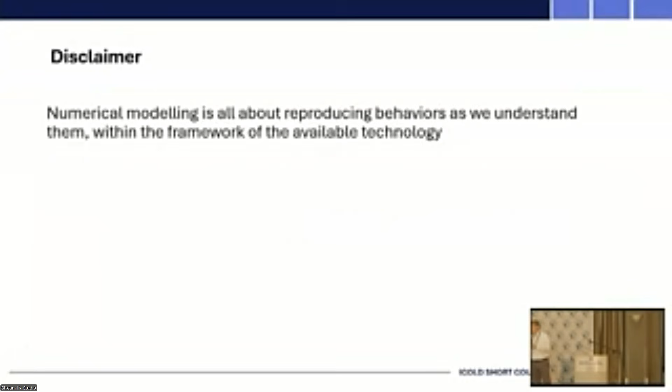So I start with a disclaimer. I will talk about numerical modeling, nonlinear deformation analysis. So the behaviors we think we understand, we create equations that we put into the computer, and the computer will reproduce such behavior. We are not creating knowledge.

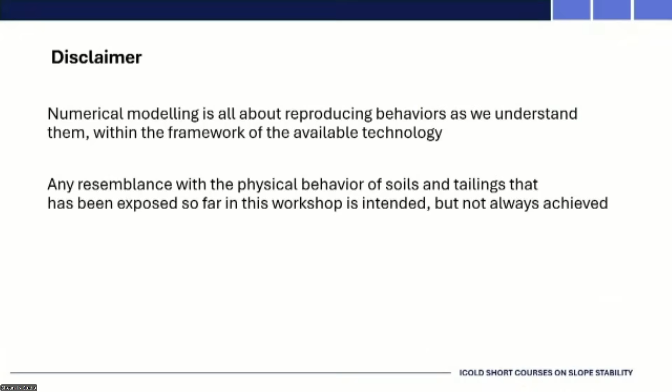We are simulating our perception of what is going on. Sometimes they look similar, so any resemblance with physical behaviors as we understand them today is intended, but sometimes we cannot make it. So it's always some sort of a compromise.

And while nonlinear deformation analysis has a lot of uses, for instance for informing monitoring systems and all sorts of things, today we will just focus on vulnerability assessment, addressing the risk of a tailings dam to flow liquefaction.

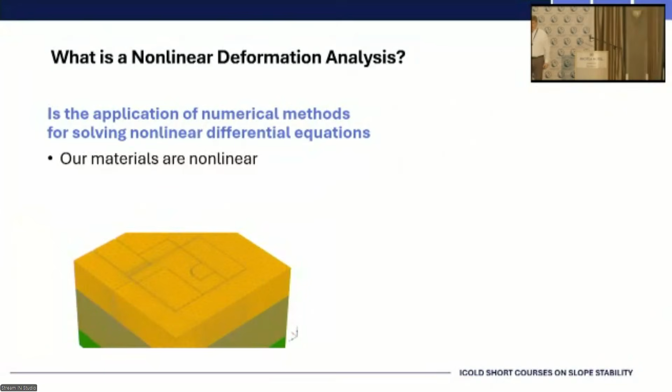Okay, what is a nonlinear deformation analysis? Well, it's the application of numerical methods to solve nonlinear differential equations. And our materials are nonlinear.

Our problems have complex shapes, and we build in stages. So on the right side, you see a number of stress-strain behaviors that exist and are applied to some soils, rocks, or materials that we may use.

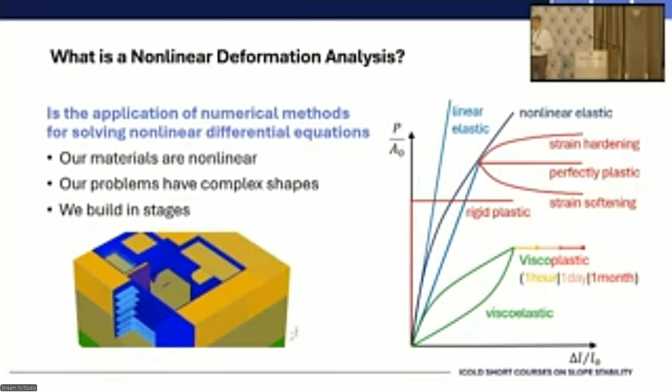On the left hand, you see an excavation, a civil excavation, with a lot of stages. You use a nonlinear deformation analysis to apply any of these behaviors that you see on the right to a problem that may be anything, a tunnel, an excavation, or a tailings dam.

Where should we use nonlinear deformation analysis? Well, I compare with limit equilibrium. It's an easy thing for me. In limit equilibrium, equilibrium and kinematics are only satisfied on the sliding surface, and we try a lot of them.

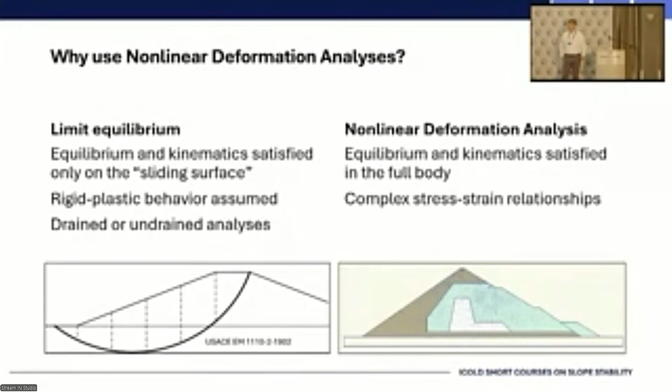Instead, in nonlinear deformation analysis, equilibrium and kinematics are satisfied in the full domain of the study. Limit equilibrium is rigid plastic; nonlinear deformation analysis covers any of the many stress-strain relationships we've seen. Limit equilibrium is fully drained or fully undrained; NDAs also handle transient flow and consolidation. Limit equilibrium has no inertial forces; NDA accounts for a lot of inertial forces in dynamic pore pressure.

While I was speaking, the dam at the bottom right was shaking. Those were waves coming from a ground motion, from an earthquake, propagating with amplifications within the dam body. All this is easily achievable with nonlinear deformation analysis, and is way beyond what can be done with anything close to limit equilibrium analysis. So which are the ingredients of a good nonlinear deformation analysis?

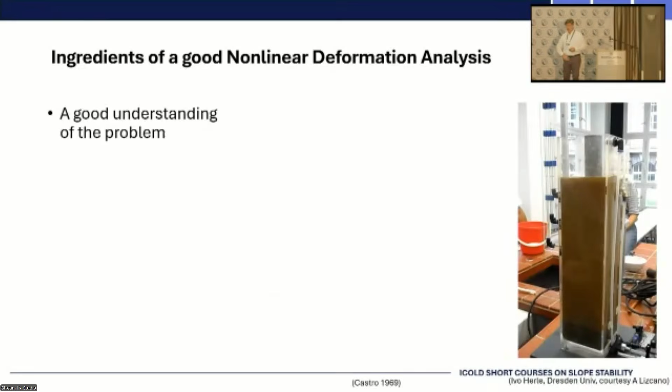First, a good understanding of the problem at hand. So now we have this chart from Castro 1969. It was already presented before in a much nicer format, but this is the original one.

This is a gentle blow on a pile of sand. A gentle blow, the sand liquefies, the full sand liquefies, not just where the blow is hit, and whatever is on top, that cylinder goes into the sand. So that's a good understanding of the problem. We need to do that.

We need a good reason to use NDA, and so far we have a lot of presentations where, when simpler methods that stood the test of time, like limit equilibrium, can be used, let's use them. But you heard in previous presentations that if this is not working, throw it to NDA, and we have been thrown a lot of these.

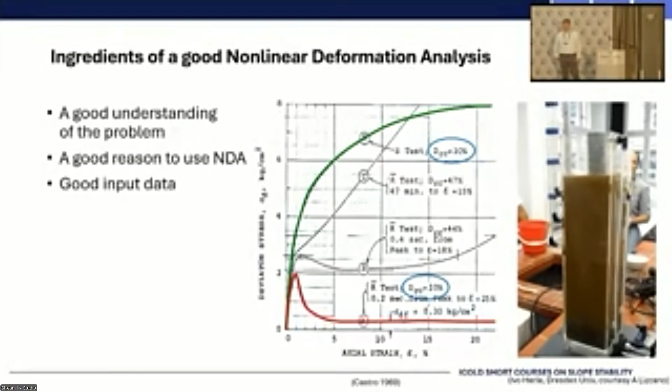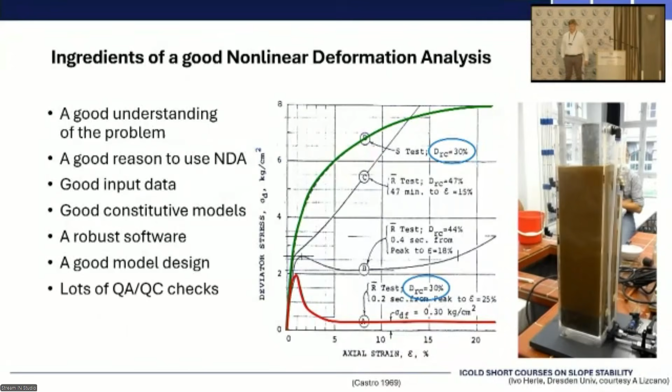When it comes to NDA, nonlinear deformation analysis, it's kind of the ICU of a dam. Everything else has already been tried and failed. We need good input data from day one, good constitutive models. We're not going to fix this with Mohr-Coulomb or anything close to that. A robust software - we're lucky to have about 10 to 12 different software packages that now compete providing solutions for this. A good model design, lots of quality assurance and quality control checks for the numerical aspects, not just the geotechnical aspects, and a good interpretation of the results. Meanwhile, the poor box keeps getting some blows, and it keeps liquefying.

So let's move into modeling the behavior of sands in monotonic shear. I'm not describing the real behavior of sands, it may look similar. I am just saying how we model it, okay?

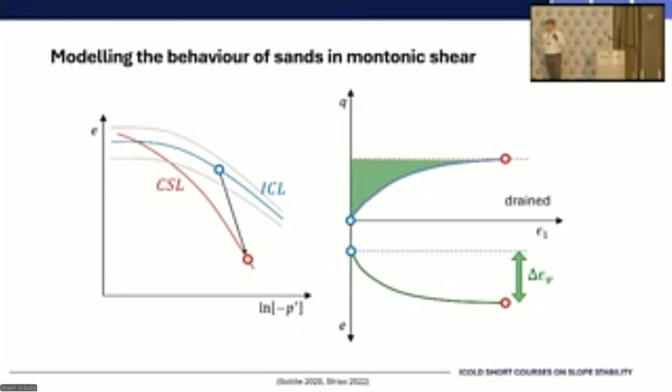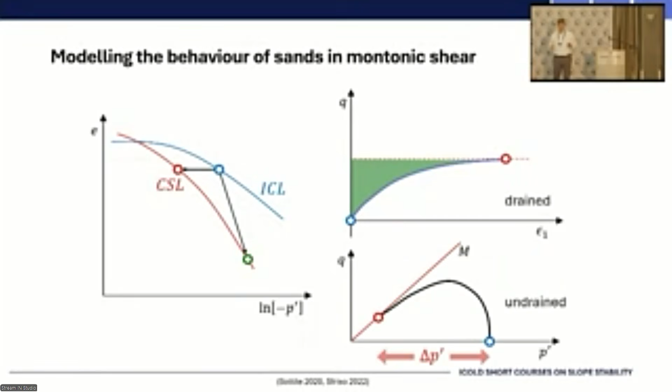When we go undrained, because the total volume cannot change, and we are talking about elastoplastic models, the elastic volumetric strain and the plastic volumetric strain must add up to zero. One plus the other, total zero. This doesn't mean there is no elastic and plastic volumetric strain - there are, equal and opposite in sign. So what does it mean? If you go undrained, the same green shape you see on top will be responsible for the loss of confining pressure, or the loss of mean pressure. So the position of the red circle, right figure at the bottom, is directly and uniquely defined by the area of the green stuff on top.

This is how we model the thing with any of the constitutive models that are around. If a constitutive model is able to capture this behavior, it's because it has a good and solid stress dilatancy equation. It doesn't need anymore, okay.

Choice of the constitutive model - there are several, there are many. The most popular today I would say is NORSAND. It's very, very robust and very reliable, and there's a few buts. Also CASM, clay and sand model, was the one used by the Barcelona group, Arroyo and Gens, for the Feijão thing. It's a very nice model, with some buts. All of them have limitations. HSS, the hardening soil with small strain stiffness, available in Plaxis and now in FLAC, MIDAS, RS2, is also perfectly fit for this kind of undrained analysis.

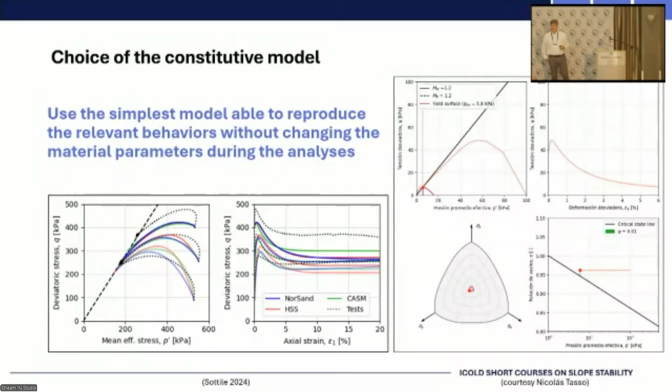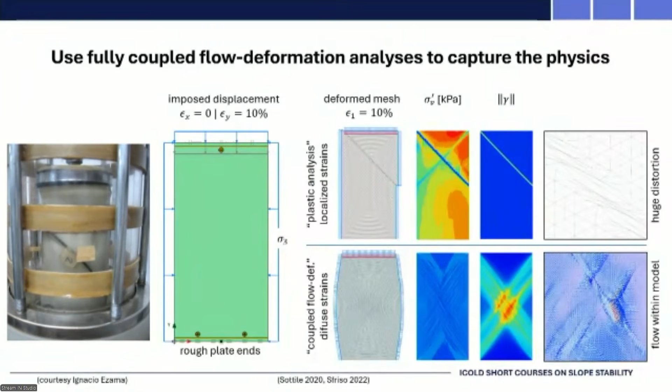What is happening in liquefaction? Whatever is the softer portion of your real experimental sample will create a peak in pore pressure. This peak will propagate throughout the sample, not stay where it started. It will propagate at 1500 meters per second, the velocity of sound in water. So the full sample will see an increase in pore water, creating progressive failure. You can model that with fully coupled flow-deformation analysis, as advocated by Andy an hour ago.

So let's move to these ingredients. Now we will make our meal. We will work on the vulnerability analysis of flow liquefaction.

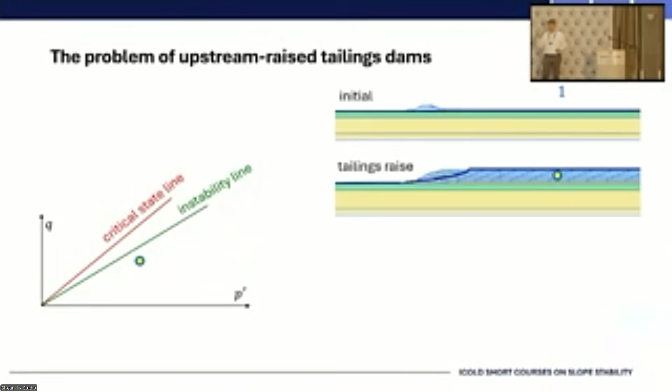Let's state the problem using this model, pretending that the model replicates reality. So we have a dam, and point number 1 indicates a point that doesn't yet have any tailings, but as we raise the dam, this point has some stress because it's located far away from the slope, but at some given depth. As we raise the dam, the point gets more and more load, and because it's so far from the slope, it follows a K-not compression.

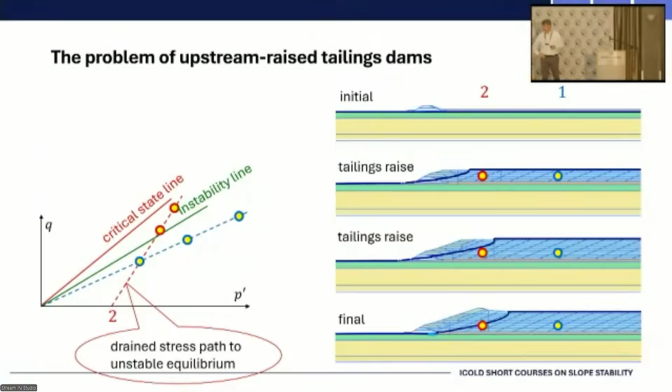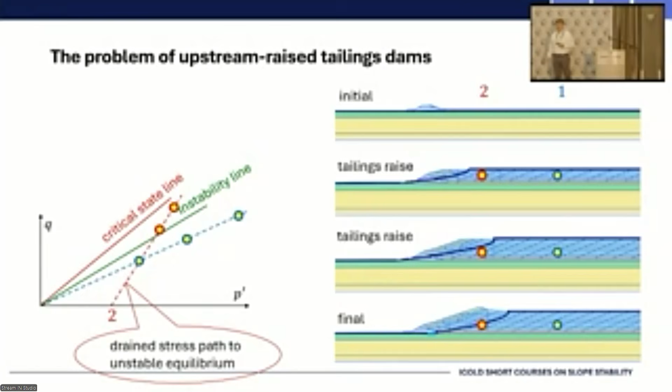Now let's look at point number 2, which started like point number 1, far away from the slope in the first rise, so it's again in K-not conditions. But as you raise the dam, the slope ends up being above point number 2. That creates more shear stress and less confining pressure. So the stress path of point number 2 is shown in the left-hand figure, and it's a drained stress path beyond that green instability line. That puts you in a dangerous condition.

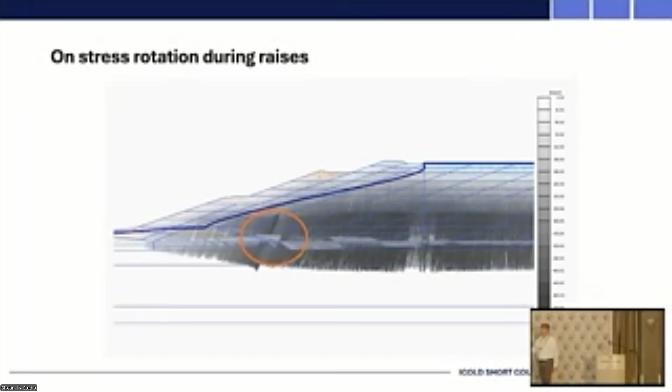Now look what is happening in the circle, this stress rotation. Where the circle is, you see the lines rotating. This means that what is happening far from the slope is that stresses are increasing but stay vertical; close to the slope, they rotate. And they create this condition for instability.

So instead of using the ICOLD chart, I'm using this one just because of the shape, the ratio. It's easy to use this for this presentation.

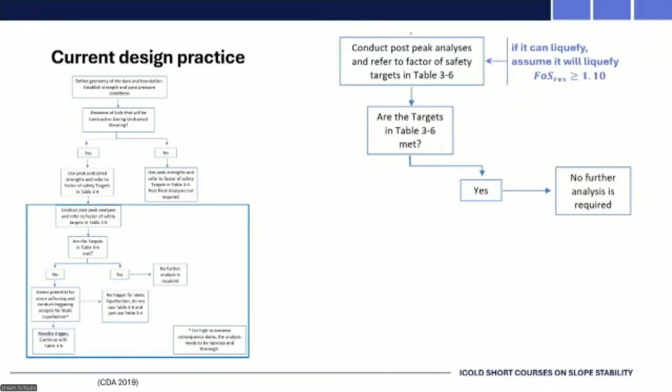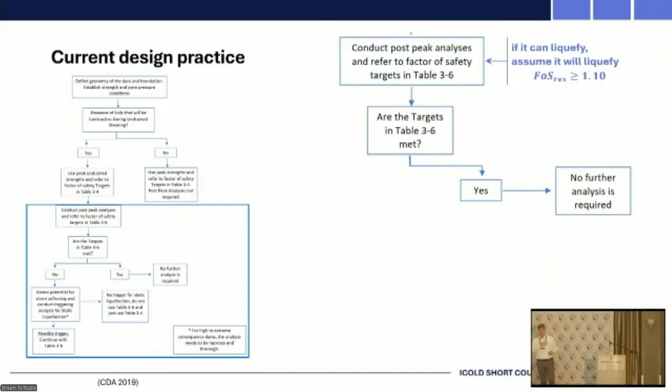So the current design practice is: do we have contractive materials? No or yes? Well, we're talking about conventional tailings, so we go to yes. We try with the factor of safety 1.5, or this much more elaborated and sound method that we now have in 194. And then we go to the concept that if it can liquefy, assume it will, we target 1.1. If you're lucky, no further analysis is required, I have no job. But if it comes to my desk, the factor of safety didn't work. So now we need to assess the potential for strain softening and conduct triggering analysis for static liquefaction that has to be rigorous.

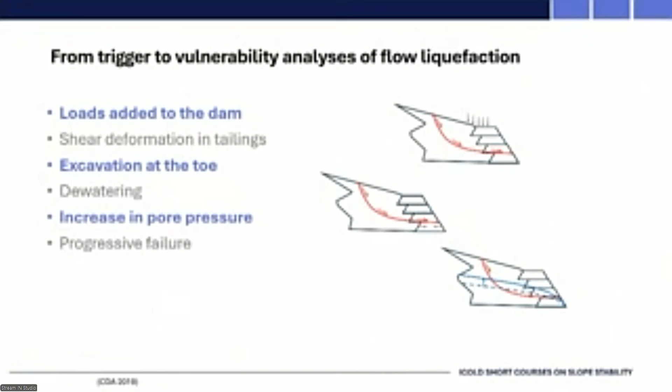And then this is when nonlinear deformation analysis comes into play in this game. But the idea of applying a lot of triggers looks appealing, it's time-consuming, and it's very difficult to interpret the results. So you get a number of results, and what? So what?

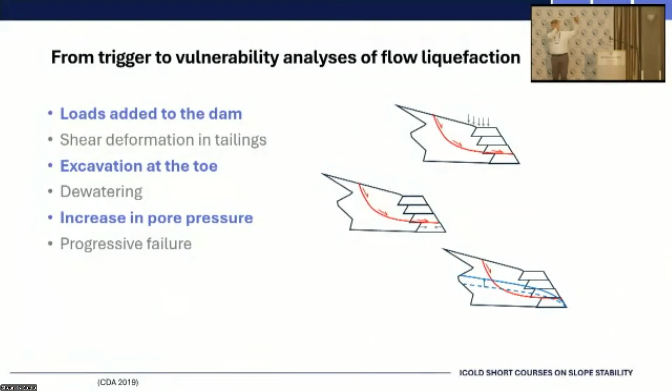What we are trying to do now is group the many different things that may happen to a dam and bring it to failure into essentially three: something that will happen close to the crest or at the beach, something that will happen at the toe, and anything that may happen within the dam, including the increase in phreatic surface. Why this? Because we have found that when you do risk assessments of what may happen at the crest or beach of the dam, you put in the same bag overtopping, flooding, the pond coming to the slope—a lot of things that are intermixed, interwound, so you can treat them essentially as one. That can be challenged, and we're happy to do more tests, but I'd say these three, we must start with.

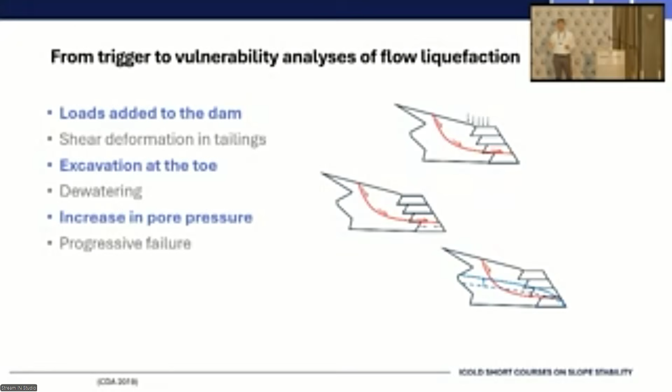Why are we doing this? Because then, at or close to the toe of the dam, you are reducing the horizontal stress. By doing this, you are reducing the mean pressure and increasing the shear stress ratio. And the third one, which is a classic, you increase the phreatic surface, which will reduce the mean pressure without changing the shear stresses. So we do all three of these things.

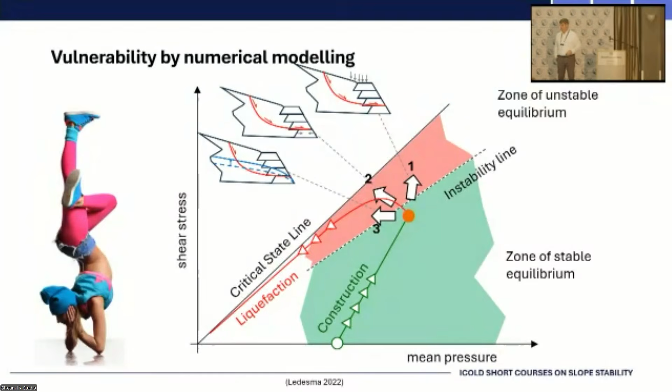And we get values, a load of 100 kPa or a toe displacement of 3 meters. Those values never come into play - actually much smaller - or an increase in the phreatic surface of 25 percent, if I'm optimistic today. And we can plot them like this. So we have this three-dimensional thing, which has units of load, meters, and percent. It's a very complex chart.

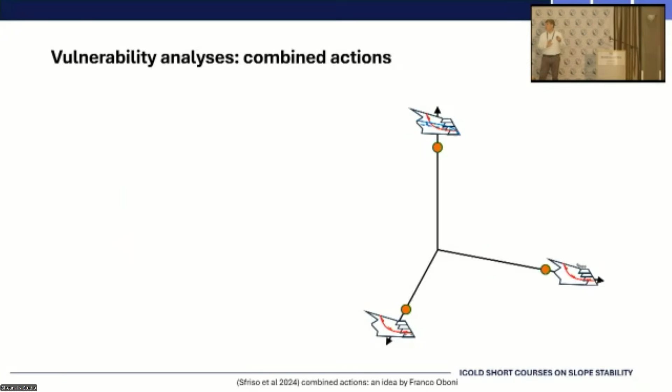We can test this, and we can also run these exercises increasing the vulnerability, the triggers, in couples - so we keep one constant and increase the other two. If we do this, we can create a sort of vulnerability surface, can we put it that way? The combination of any of these three that may bring the dam to failure. So the idea is that we have here a cross-section of that vulnerability surface.

The dam is somewhere, and all the analyses have some uncertainty, and we need to deal with that. So far, what is common, what is always used, is to check these three and say 100 kPa, 3 meters, or whatever the three values, and come to a discussion with the stakeholders about whether that is plausible or not. What I'm doing now is trying to create this combined action, also mentioned by Professor Fourie - this combined action, so we have a lot of options of things we can consider to bring the dam to failure or not.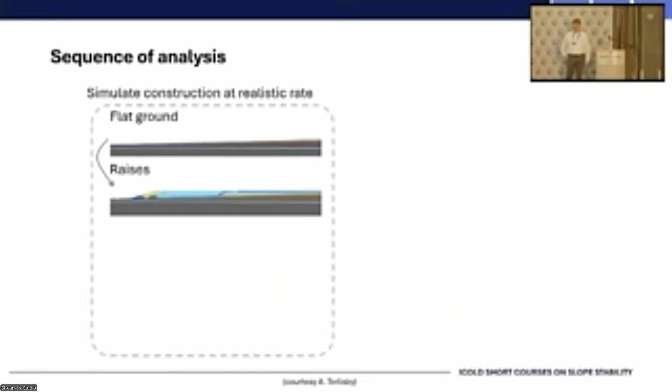So the sequence: we simulate the construction at a realistic rate. There will be some generation and dissipation of pore pressure. Then we still have to compute the short-term factor of safety. We compute it, we know it will not go well. Why do we know that? Because if we get a good result, it's not our job - why are we doing NDA if this goes well? We just confirm it.

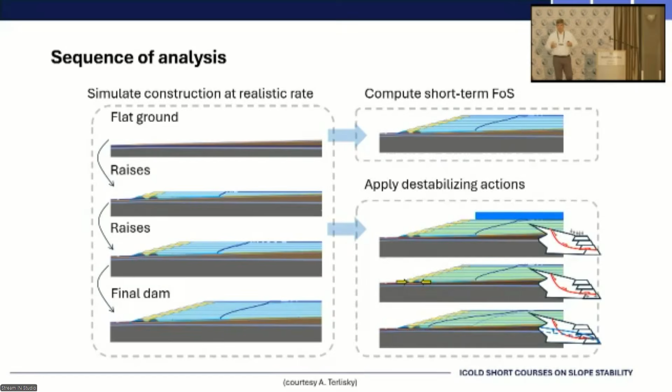And then we apply these destabilizing actions. I refuse to call them triggers, because in this case I might raise the phreatic surface of a dam even in the desert - we're applying these actions even if they're not plausible. It's a vulnerability check, very similar to the buckling of a column. You check buckling of a column to see whether the column is very robust or not - you do it and you pass. Same here, you apply a load. The dam is closed, that load is impossible - you apply the load anyway. You want to know whether a small load might bring that dam to failure, even if the chances of that load happening are extremely small.

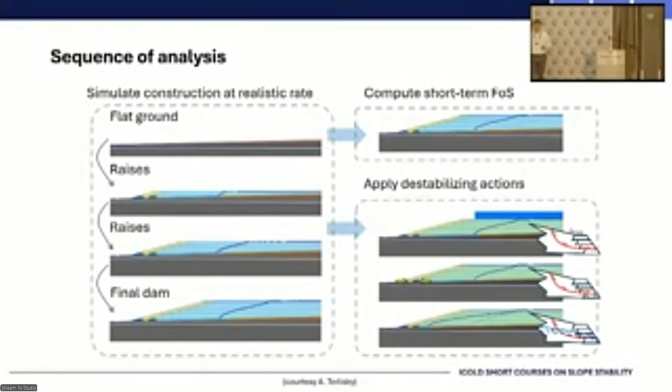A few things greatly improve the results. First, you can use the soil-water characteristic curve and unsaturated soil mechanics for a smooth transition from saturated to dry behavior. This doesn't mean you're using the unsaturated shear strength to your advantage, because what you do is put a soil-water characteristic curve that is kind of fake and will create a narrow 'rainbow zone' that splits the fully saturated from the dry behaviors.

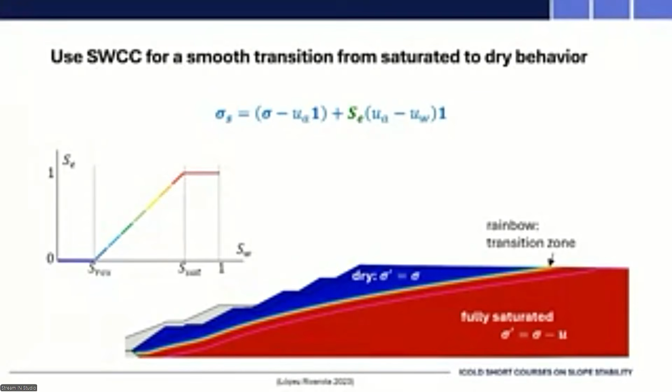Why is this important? When you're applying the trigger of raising the phreatic surface, more and more material becomes below the phreatic surface - used to be above, becoming below. If each time you raise it you need to change the material parameters or remesh to say this is now contractive, used to be drained, that's a mess. We can use this approach instead, and it's very robust, very reliable, and it just works. I'll prove it later.

Also add fully coupled flow deformation for mesh independency. As I showed a few slides ago, if you try to simulate liquefaction using just zero volume change, you get localized failure, which you don't want. You want results that are reasonably independent of numerical particularities, the mesh, everything else. If you look at the left two figures, top and bottom, two very different meshes give the same result, and without any regularization technique.

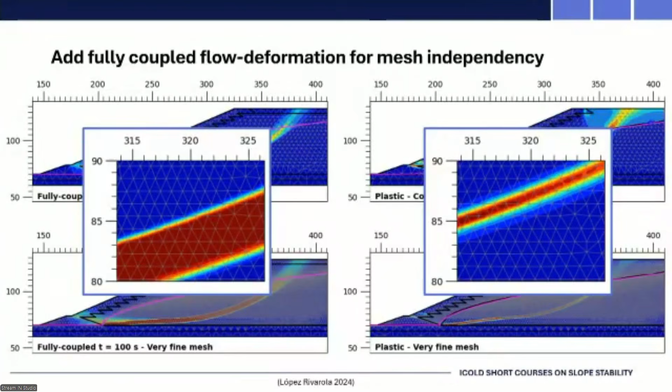This is a close-up showing that on the left hand, the size of the sliding smear zone is independent of the element size, while on the right it just happens to be one element thick.

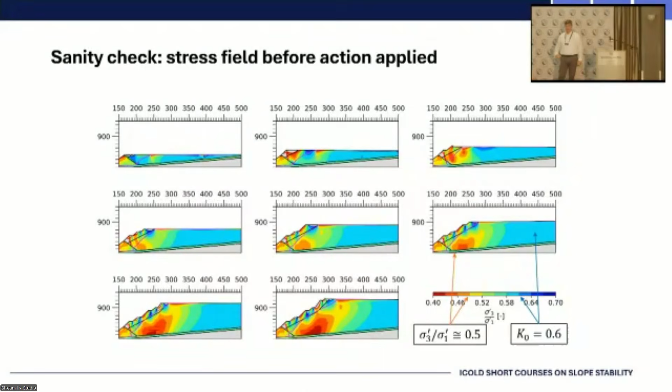Sanity checks: you must check that your stress field before you start your analysis is realistic. In this case we calibrated for K naught 0.6, but any value, whatever the most plausible K naught value that you want to use, can be employed.

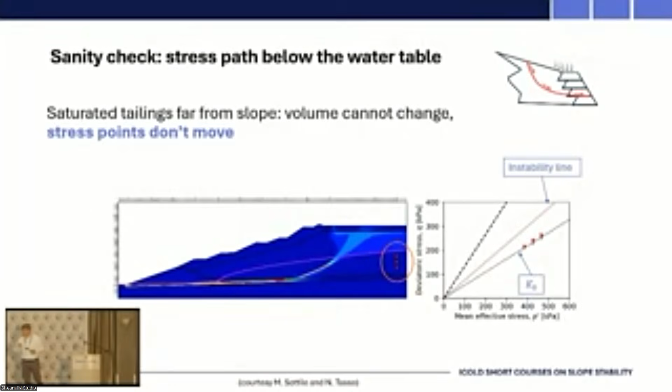But if we take the same three dots seen in the left-hand figure with the circle around them, and move them above the phreatic surface, now they are no longer in the saturated zone, they are unsaturated. Because they are unsaturated, the load applied at the crest, at the beach, will create changes in effective stresses. That is what you see in the extreme lower right figure, where all these points follow the K naught compression line as expected.

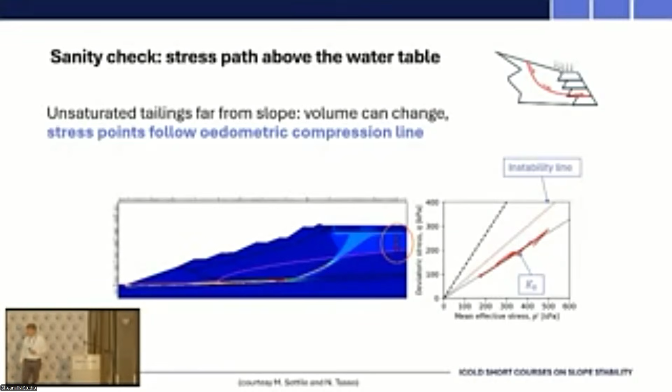Those are elements of soil that are subjected to vertical increase in stress, and they can drain because they are in the unsaturated zone. More interesting for what we're discussing is what we see in stress points located along what we now know is the failure surface.

In numerical modeling, we don't predict where the failure surface is. We run the analysis, we see where it is, and we put the points there. And as you see, all those points started to...

follow a line that I showed very early in my presentation. When you're close to the slope, you're not along a K naught line, it's a steeper one. If you put the starting point of all those lines, all of them very nicely plot on a straight line, and all of them go across the instability line and down to critical state conditions.

You may notice that the end point of those red curves is not the dashed black line. That is because the dashed black line is conventionally defined for triaxial compression, and this is not triaxial compression, this is plane strain deformation. So it should not go to the critical state line defined at triaxial compression.

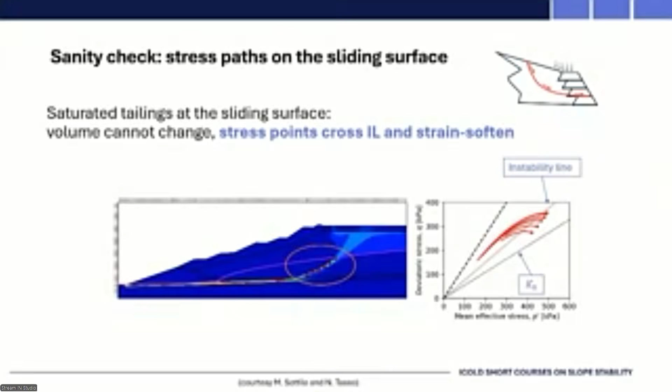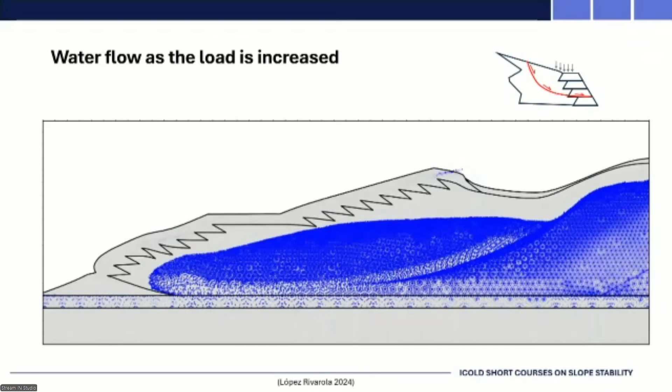This is conventional coupled flow deformation analysis, nothing different from what is off the shelf in the numerical modeling software we have available. There's nothing special, this is off the shelf, but it's using all the tools that we have in that toolbox.

Okay, so now on seismic liquefaction, we need to switch the constitutive model because none of the models I described, CASM, NORSAND, HSS, none of these are capable of predicting the behavior of sands in cyclic loading. So we start with something like HSS or any constitutive model we may like to create the initial stress field, and then we switch to some other constitutive model capable of...

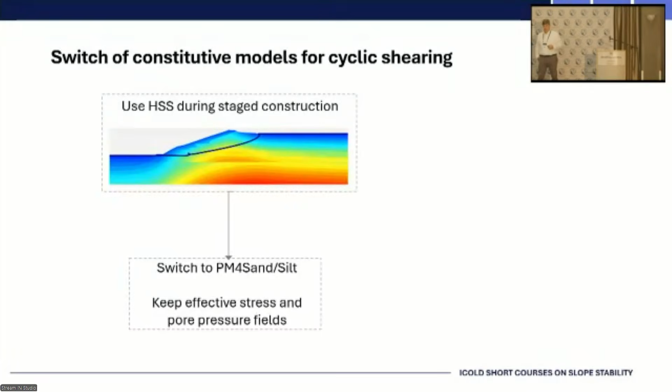reproducing the cyclic behavior, for instance PM4Sand, PM4Silt, P2PSand, keeping the effective stress fields and the pore pressure fields that we got from the previous stage, which was done monotonically in static loading. And then we apply the ground motion.

In NDA, everything else remains the same. There are numerical things you need to take into account, how do you apply the motion, the absorbing boundaries. There are a lot of tricks that you have to put in, but it's nothing extra from the point of view of theory, other than adding the dynamics to what used to be a static analysis.

And then, after this, you have shaken the thing, but for the post-seismic phase, while it slows down and comes to repose again, this cannot be properly captured by PM4Sand, it's not able to get that. So you need to switch back to the model you used for the static loading with this extra pore pressure, and see whether, now the earthquake is gone, the thing is coming down and stopping, or this extra pore pressure created by the earthquake will keep it moving. This is something you cannot address using PM4Sand only.

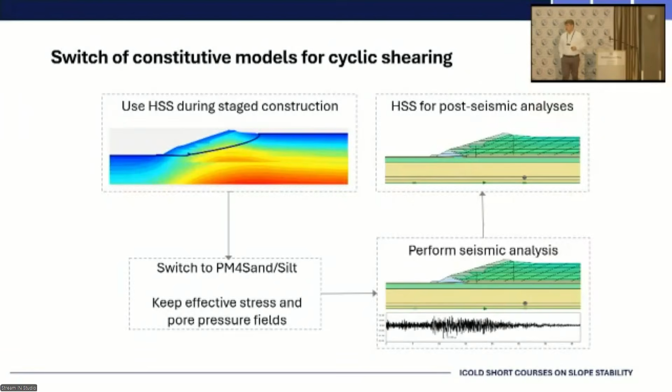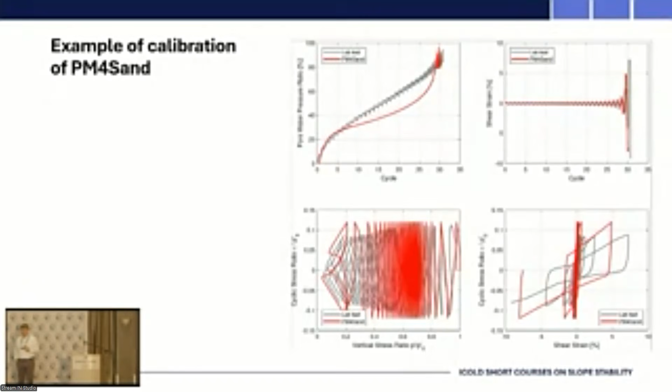Okay, so this is an example of calibration of PM4Sand. There's no information there, it's only that this is more or less the best you can do. The gray is the lab, the red is the simulation. In the bottom left you see nothing. Top left, you see they are not very similar, but this is the best we could do. Top right, this is the only one we would show if we were selling the thing. And bottom right also looks very, very good.

And now the new source of uncertainty, which is huge, is the seismic record. The idea that we are here and we found a seismic record close to here 25 years ago, and we use that one, is flawed. The uncertainty of the behavior of the dam for a given seismicity is huge.

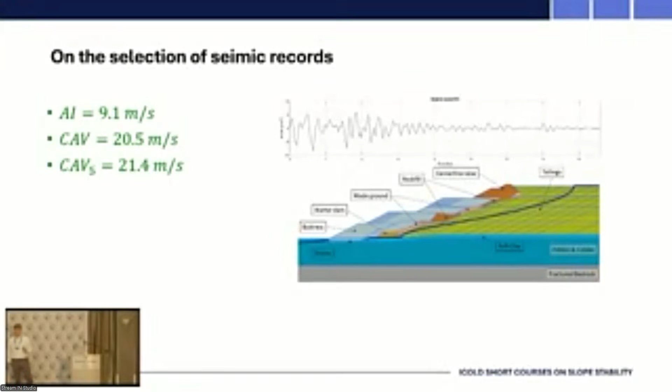So for instance, we have this ground motion with an Arias intensity of 9.1 meters per second. It's a lot of energy. And this one is even worse, Arias intensity of 12.4 meters per second. For the same dam, the first one creates a displacement of 8 meters. The second one creates a displacement of 1 meter.

So if you ask me, which of the two has more energy? The one below. Which of the two is creating more damage to the dam? The one above. Why? Look at the shape of the ground motion, the time history.

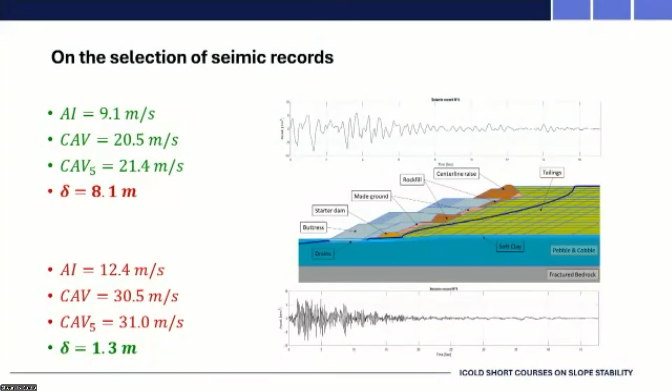So this kind of sinusoidal thing has a fundamental frequency which is closer to that of the dam. So it's hitting and hitting and hitting again before the dam can come back to stable. The other one is more like this, you know? It's not doing much to the dam. So these are the shapes of the two outcomes.

Left, less energy, but bad choice of frequency. Right, more energy, but harmless.

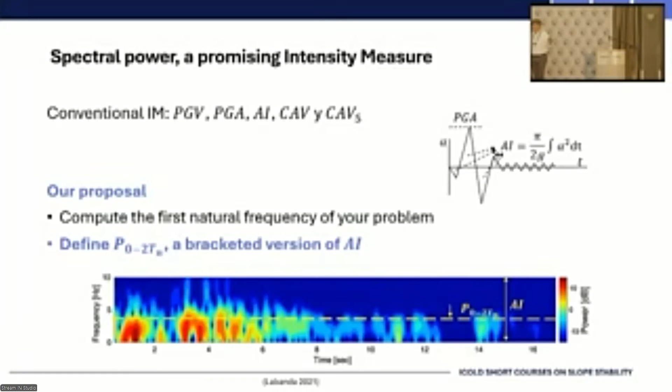And what we have found is the best prior for selecting ground motions, but with a lot of uncertainty, is to say, okay, let's check what are the fundamental frequencies of our dam, and now let's pick ground motions that will have the intensity measures, the seismicity indicators that will be relevant to the site, and from the hundreds of those that we may have, pick a few, say 20, not 3, say 20, that will have a frequency content that may be more damaging to the dam.

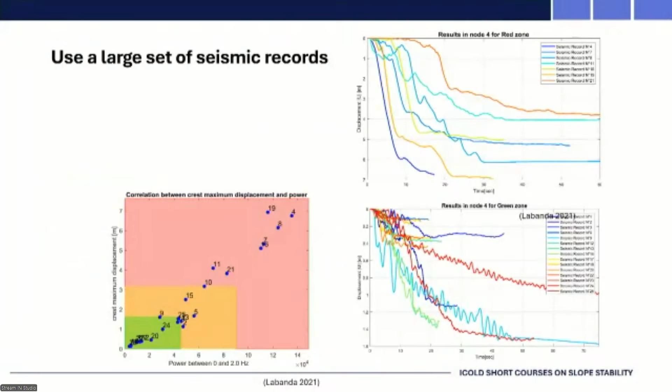We did that a number of times already. And this is, for instance, for a given problem, 20 plus 25 ground motions. And what you see left, bottom left, is the very, very sharp correlation between the crest maximum displacement and the spectral power between 0 and 2 hertz. Easy. After you run, that 2 hertz was the threshold for this particular dam. Not that easy to do in advance.

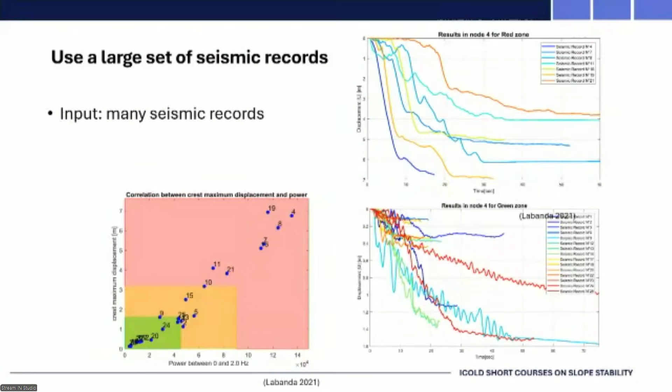So that's why we need to run a lot of ground motions. Input, many seismic records. Output, the crest displacement is a statistical variable. We are not saying that the crest displacement here is 0.3 meters or 1.3 meters. We produce a probability density function.

Given the seismicity of the site, we still don't know which will be the frequency content of the ground motion that will hit our dam. So we don't know what the crest displacement will be. It will be between this and this. And we cannot be more certain than that.

Sometimes our clients or others say, provide us a value. Don't create more problems. But this is what it is. The uncertainty of ground motions is so large that claiming we will have a certain value is wrong. What we can say is that the probability of the displacement to be above, say, 1 meter is 5% or 1% or something. And that is multiplied by the probability of the ground motion coming, which is 1 in 2,500 years or whatever.

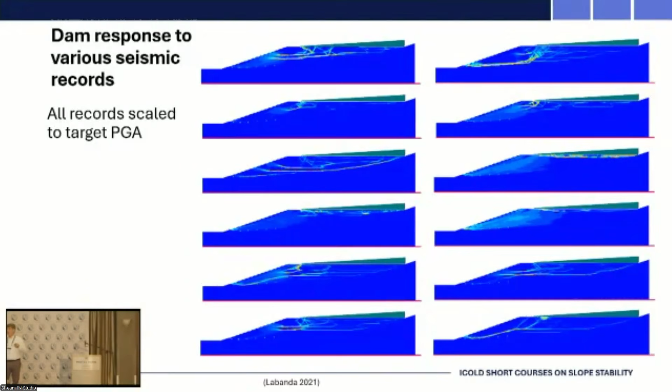So this is just a static slide showing for 3, 6, 12 shown there, for the same dam and 12 ground motions with the same PGA, totally different shapes, some of them including liquefied zones, some of them don't. And this is just related to the frequency, content, duration, a lot of things related to the ground motion, and all of them for the same material parameters and the same geometry.

So now I'm moving forward, and this is a teaser only. I toned down this a little bit. How can we do one step towards leaving factor of safety behind and moving into probabilistic or semi-probabilistic design methods?

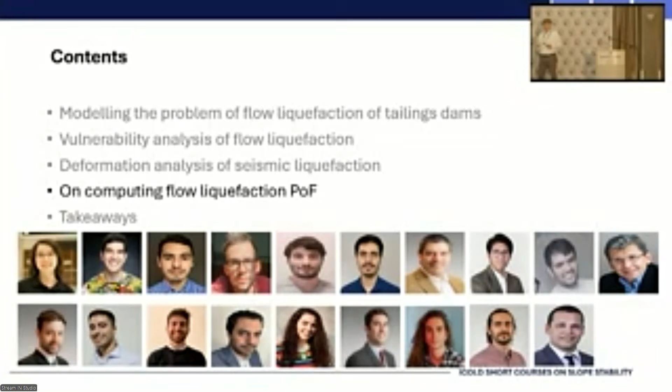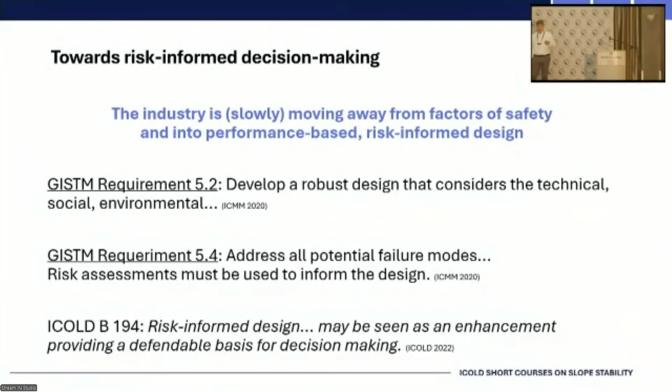Well, with all the information that we currently have, there is something we can do. You know that the industry is slowly moving away from factor of safety and into performance-based risk-informed design. Slowly, it's happening. It is in GISTM, it is in ICOLD. Well, what is performance-based risk-informed design?

It is the combination of a set of features. Please read this paper by Professor Morgenstern. So intelligent dam design and operation at large, in a nutshell, is taking into account failure modes and quantitative risk assessment.

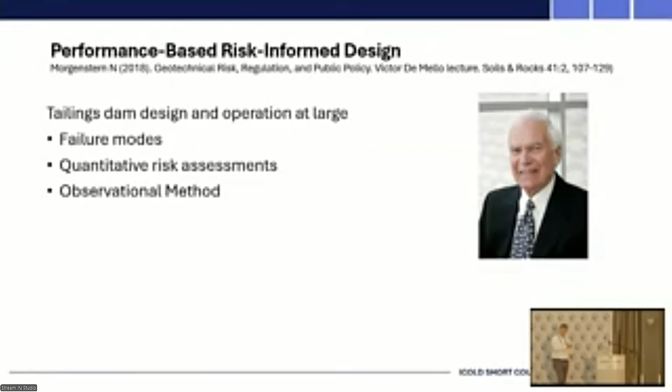So I have a team of people properly doing quantitative risk assessment and addressing the probability of nasty things happening to my dam. Bear in mind that we have this group already. And applying the observational method, which works for a lot of things, including the precursors of flow liquefaction, but not for flow liquefaction itself, as has been perfectly explained before me. The brittleness means that once the thing starts, it will happen within seconds, so there's no early warning.

So for flow liquefaction, the observational method is not applicable where the failure mechanism is brittle. Vulnerability must be addressed at design level - that's what I think, maybe I'm selling this now, maybe there's a commercial component to it. But I do believe that the only sound way of addressing whether your design is vulnerable is at design level. If you wait to build it and check that it is vulnerable, that is too late. And a QRA can inform an estimate of probability of failure.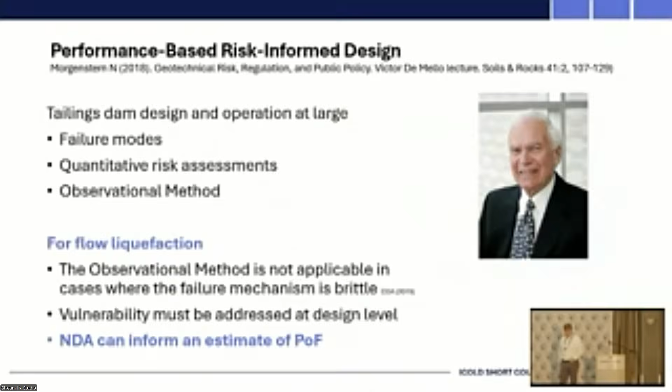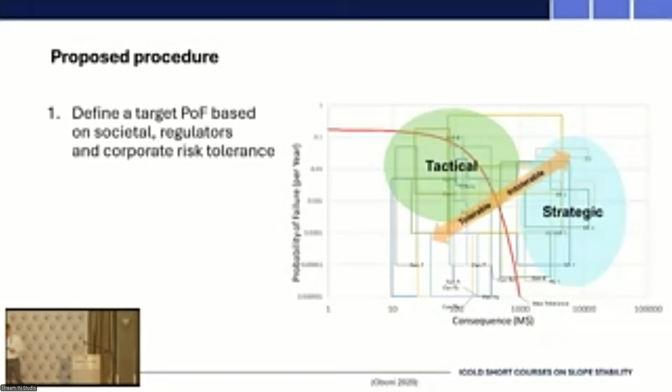How? We need to define our threshold, our acceptance of the reliability we are targeting. Define a target: annualized probability of failure 10 to -4, -5, no problem. Pick a number and leave it - we are not going to revisit the value after the result. This is cheating, we are not going to do that. So first, we pick a probability of failure that will be our target.

Then we need a procedure for selecting the material parameters that we all agree as a starting point. We don't need to invent the wheel here - we have Eurocode 7. In Eurocode 7, it's now mandatory, a mandatory procedure for selecting material parameters for all geotechnical engineering problems.

For instance, if you are dealing with a pile, because the length of the shaft is much bigger than the scale of fluctuation - that is, the noise in the ground property controlling the strength of the shaft - you must use the average value. So the average undrained shear strength applies to the shaft capacity of a pile. But at the tip of the pile, the volume of ground required to fail the tip is just about the size of the width of the pile, maybe a little more, but not more than that.

If the volume of ground required to get some expected behavior, for instance at the tip of the pile, is on the same order or smaller than the scale of fluctuation of the relevant property there - for instance friction angle at the tip of this pile in sand - then you must use a tail value with a probability of exceedance. In the most extreme cases it's 5%. In most cases there is a formula, and you end up with a tail of 10%. It's not by heart, it's not a consensus - 25, 23, 15, no. We have a formula, and we end up using the same thing.

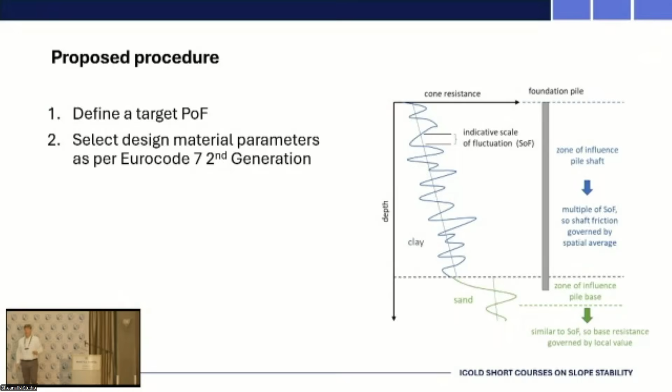If we follow this idea, then for a particular failure surface, you will have a portion that is largely horizontal. And because we are depositing tailings in horizontal layers, we might be unlucky - we might have had some slimes at the early beginning of our deposition. So for the horizontal surface, unless we can prove it otherwise, we should use a tail. In this case, I used this red line at 10% tail and ended up with 0.05, this very nasty undrained stress ratio.

But for whatever is at the back scarp, that goes across all the layering, so the scale of fluctuation of our tailings as a geotechnical body is the layering - it's like this, more or less, and the scale of this is 50 meters. So we use the average, and we end up with a much nicer residual undrained stress ratio of 0.11. This is a proposal - this is the Eurocode way of doing this, but today it's a proposal. It's not true that this is an accepted procedure.

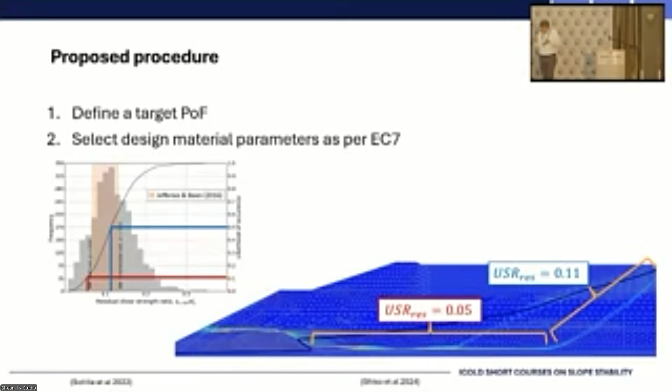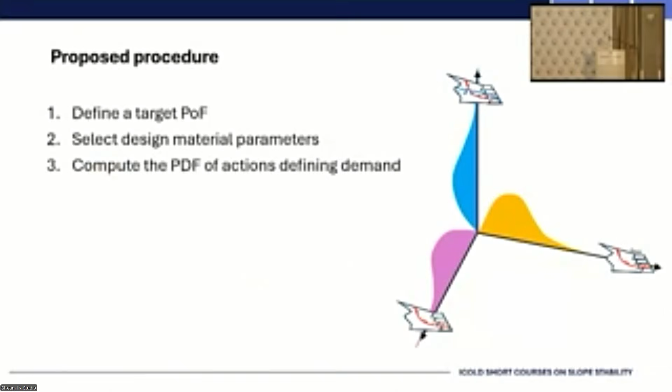And in this particular section, I am moving to the boundaries of what is accepted today. Third, call them in - we have this group of people, and we ask them to compute the probability density functions of the actions defined in the demand, which is the probability of your crest load being 10 kPa, 20, 50, 100, 1,000. And they will give a set of values, and I put these probability density functions as very colorful, nice charts.

In the screen, those figures are probably more colorful than they should be. Now we have them, and we come back to the numerical models, and we can use our standard procedure for estimating this vulnerability surface.

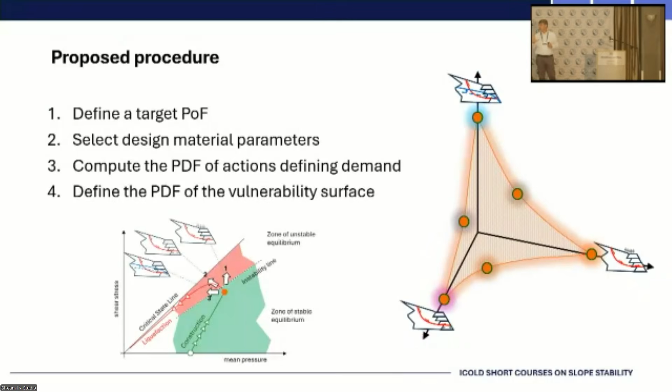Instead of just picking one undrained stress ratio or one state parameter, we pick within a range. So our own shape is not fixed or deterministic. It also has this shadow, it's glowing. We don't know exactly where it is. But once we have this, now it's easy.

Because it's just doing Monte Carlo. We pick any one value from the PDF, the probability density function, of one action, one value from the other, one value from the third one. We end up in one point.

Is it below this threshold? We are safe. Is it above? It fails. We do it 100 million times. We can, and we end up computing the probability of failure of the dam by standard Monte Carlo analysis.

How can you do this a million times? Because you only run these six numerical models, and you create this interpolation surface. The other colorful things came from this group of people that we only met for a couple of mornings to get those numbers. And then this is very simple math, just Monte Carlo running from analytical equations.

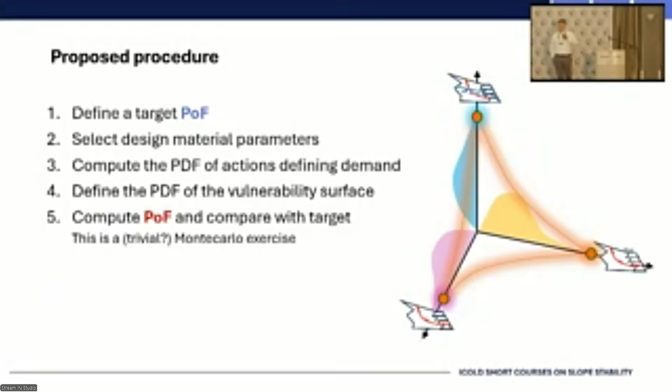It can be done. This is beta testing. We didn't get it through a client and fully approved yet. I don't think we'll have it in 2024 or 2025, but this is our way of thinking moving forward.

And you buttress the thing, and you see that the probability of failure is now 10 to minus 5, so you're okay. Maybe you see, okay, well, we can reduce that buttress. Yes, out of this, if the probability of failure is way below your target, you have some support for revisiting the size of your buttress.

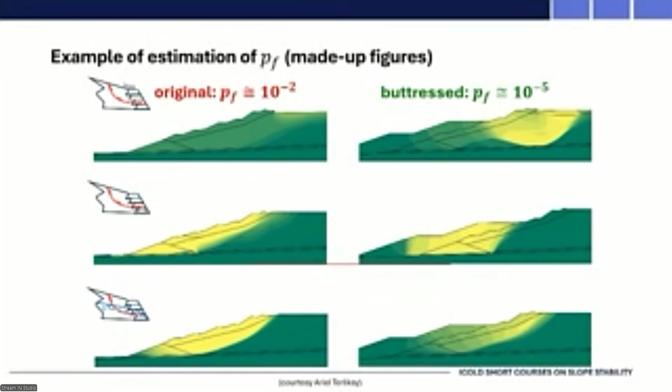I'm closing. Takeaways. First, a lot of papers from our teamwork trying to prove that this, or what we are saying, is sound, and some of them are a little bit contradicting, I must admit, so please just read the recent ones.

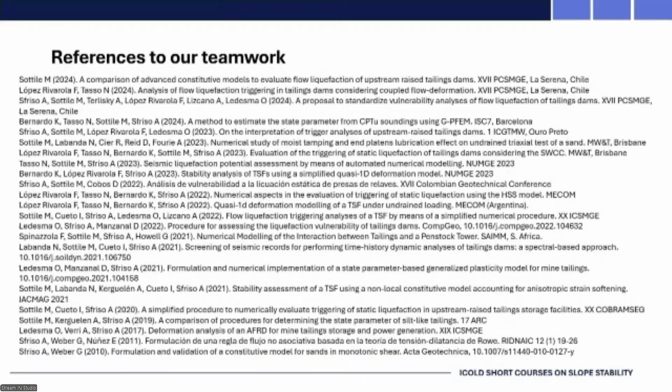Our takeaways: first, modeling the undrained shearing of loose tailings is all about stress, strain, volume change in critical state soil mechanics. In undrained mode, there is no volume change, so it's stress, strain, stress dilatancy theory, if you have it all.

Then, upstream raises create a drained stress path towards unstable equilibrium that can trigger undrained failure. It's like the lady standing on her elbows.

Third, vulnerability analysis deals, imperfectly, but as Professor Fourie pointed out, deals or attempts to deal with both the known and unknown unknowns. We try to do this. Of course we fail, but we try. It's a good thing to try.

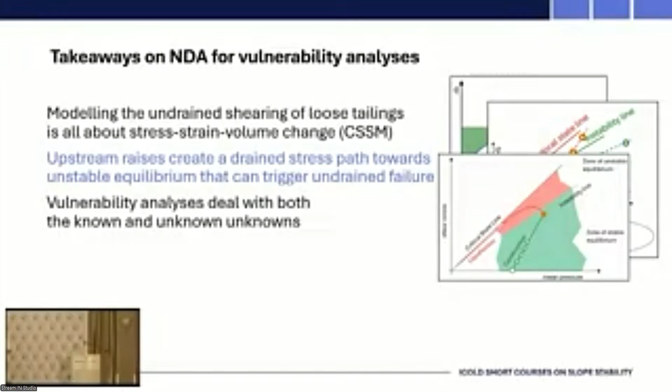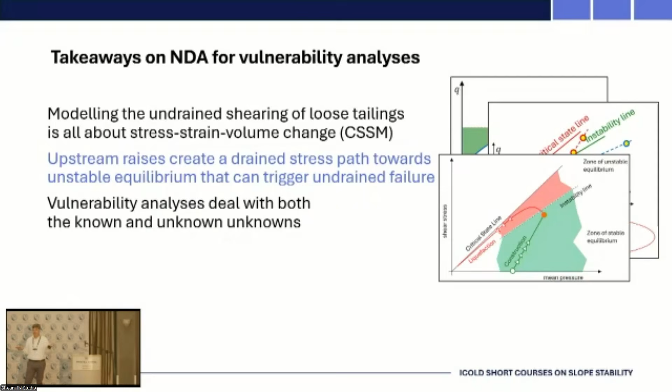Instead of saying, in this particular dam there is no water, don't do that analysis, we run this set for the three of them, and we leave the risk assessment team to say the probability of the water table being this high is 10 to minus 8 or whatever. So we leave it to them. This is a way of splitting the uncertainty into the very sources of uncertainty and not combining them all into just one number, for instance, 1.5.

In seismic analysis, it's more or less the same thing, the same tools, other constitutive models, of course, but please add the uncertainty of the ground motions. Use as many records as you have available, and bear in mind that they should have very different frequency contents, because the frequency content is largely overlooked and plays a major role in the outcome.

And we have some ideas, preliminary ideas in test mode towards computing a probability of failure of tailings dams against flow liquefaction, or at least to have an estimate to inform the stakeholders about this. With this, I close.